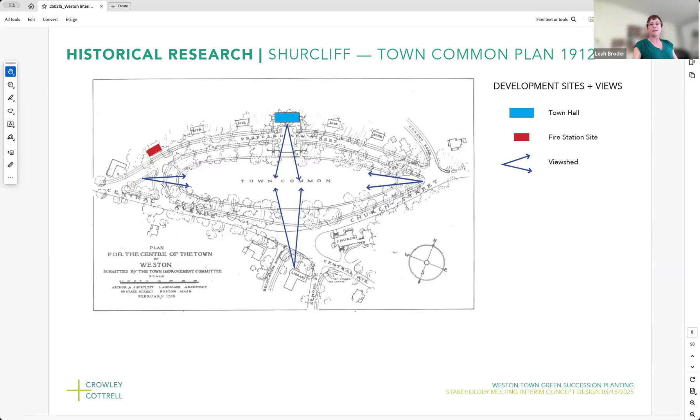Also important is that there was a prominent gathering space designed to cross the road and extend with a promontory and retaining wall into the common.

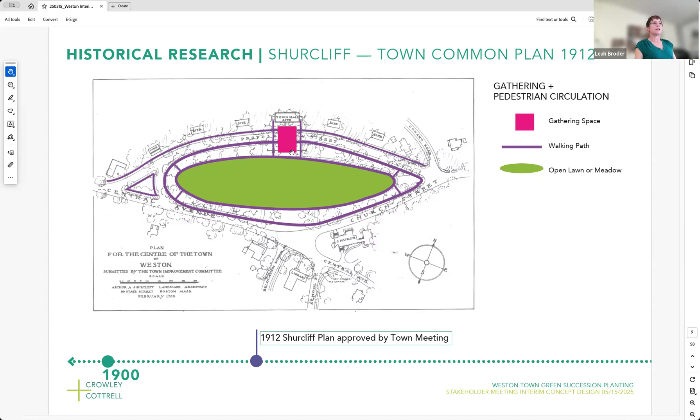But Shurcliff actually responded to site conditions that he found. So he did that preliminary plan, which is conceptual, and then in 1917 he gets down on the ground and starts designing the actual road, and in so doing realizes that the undulating topography of the existing wetland is something he's going to work with and not against.

He also recognizes the importance of holding up the perimeter road, keeping it at a higher elevation, and using the existing wall at the base of the existing shed. That becomes an important element of the plan which is there today, and we refer to as the overlook.

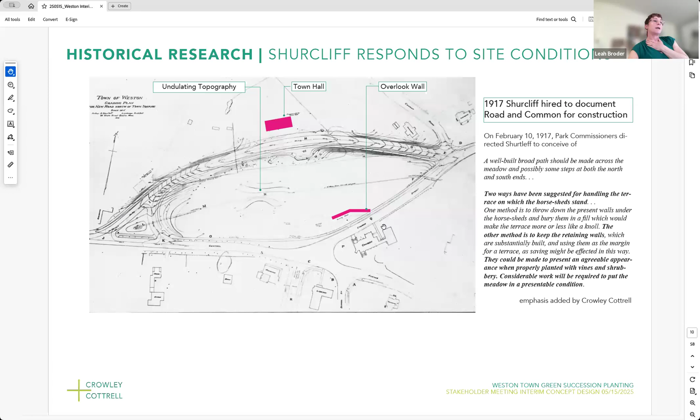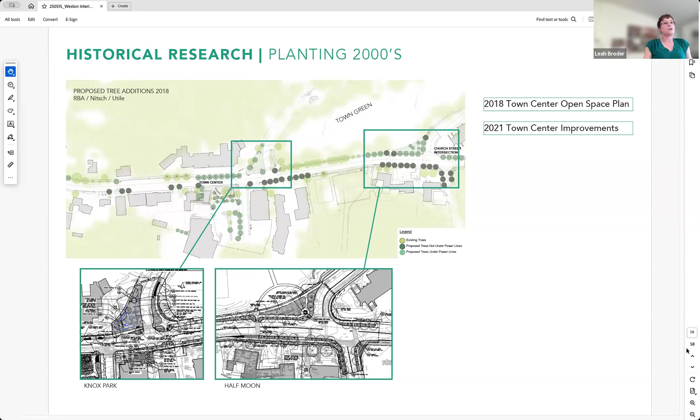We understand that there were big concerns raised about views of the church, and that those street trees would infringe upon those views. These street trees also were not planted. There was also concern about views from the town center all the way to the town hall, I believe.

So we also did a site inventory, looking at existing conditions. This is an aerial view of the site. Do you want me to do this, Leah? Sure, yeah.

The reason for us to do a site inventory is just to really document the things that are working and the opportunities and the constraints that exist right now. Some things are still remaining from the original intent of Shurcliff and some are not. So it's really important for us to just make that existing conditions report in a way.

So these are views that are into the site, and we think it's really important to acknowledge the fact that there are places where you have these long views, primarily from Town Hall across the road to the library and vice versa. We also acknowledge that there are partial views, but that really only exists on part of the perimeter. That's something we get into and acknowledge that probably wasn't the original intent.

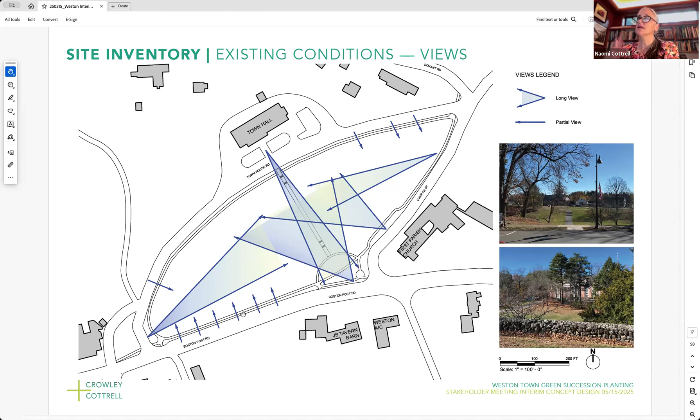So we'll make an analysis of that further. Go ahead.

So the circulation is something that does actually vary pretty wildly from the original concept drawing of Shurcliff, but there's never been, that we could find in any historical reference, an interior or a lower path.

So really any pedestrian movement that is on pavement is really relegated to the sidewalk on the perimeter roads. We do understand that this pedestrian access through the middle from Town Hall over to Boston Post Road has been in the works from the very beginning.

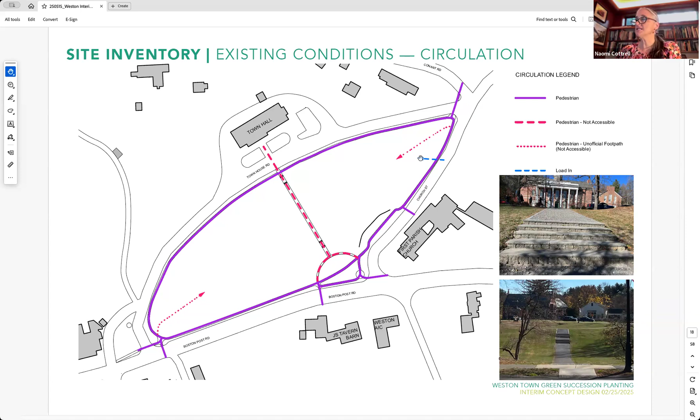It is not accessible for universal use, and so we call that out here. And then also just showing that we understand that the use of the site includes pedestrian access from the two thin corners from east and west, and certainly that there's vehicular circulation coming in from the east. Go ahead.

We have seen the photographs and understand diagrammatically how the town common or town green is used in a more formal way and in a more informal way. The formal ways being things like graduation, which is really important to the history of the town. Informal uses such as sledding down the hill in the area we refer to as the Half Moon.

There is really this feature of mixed vegetation that has grown out of years of what initially was the remnant woodland, and has been added to over time to become a collection of multi-story plants.

I believe Naomi might have been cut off, so I'll pick up while she reconnects.

We also look at topography and understand that the basic drainage pattern remains, that there is a low wet area down the center of the project, and that the high areas are at the perimeter.

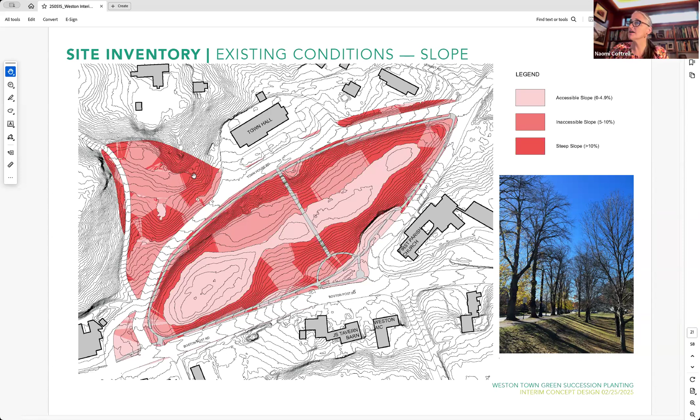We know that there's ledge, and this is part of what we will deal with, and part of the reason why our recommendations are more broad brush, because we're not picking exact spots.

We know that if a tree were to be determined to be planted in these areas, you might have to move it 10 feet to one side or the other because of ledge.

And then lastly, in our look at the existing conditions, we do understand that there is infrastructure, both drainage as well as other utilities that run through and along the perimeter of the site. Again, this is in with our thinking, but would be more something referred to when actual planting were to happen.

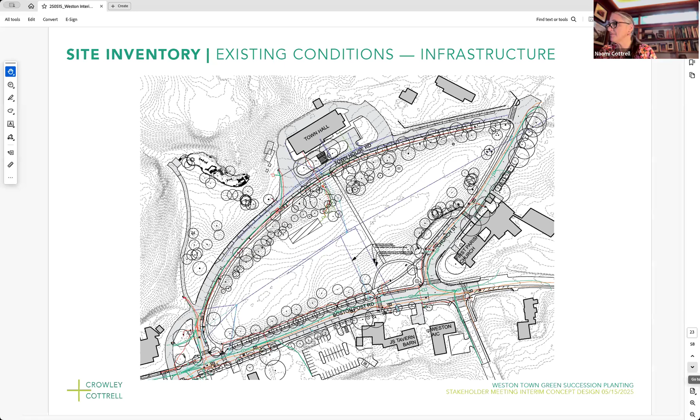Go ahead. So then we will quickly move into the tree inventory and analysis. These are drawings that we have done based on Bartlett's work on site.

They made a thorough inventory of all the existing trees, and it's very clear that the trees are grouped primarily along the perimeter of the site. We also looked at Knox and Lamson, and you can see the clusters, the way the trees are clustered.

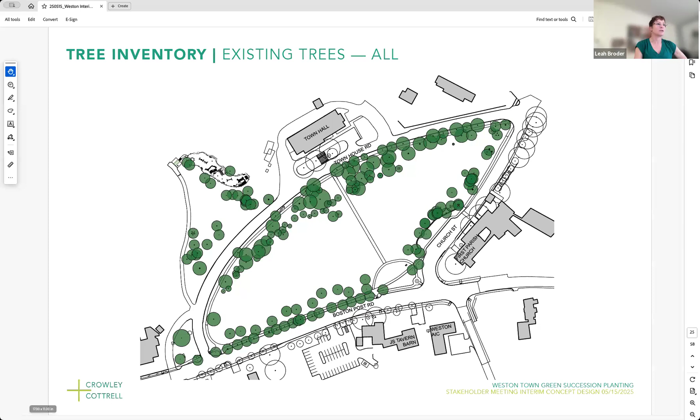We know that there is a broad variety of species, which is always good in terms of both habitat and also resilience to pest or disease. So that's interesting to look at.

We wanted to break that down a little more to understand if there was a clear strategy to the distribution of species on site. What we see clearly is that the trees planted immediately adjacent to the road, in what we call the verge, between the sidewalk and the road, are single species trees.

So we know it's the lindens on the south and the horse chestnuts on the north, but it's also clear that the consistency of those plantings has eroded over time, as Carol referred to at the beginning of the presentation.

There is a kind of range of deciduous canopy trees planted on those slopes. There is a preponderance of maple and oak, but there also are a number of other deciduous species interspersed.

And the evergreens - there are prominent ones right in front of Town Hall and also a big group of hemlocks in Lamson Park. And then there are other evergreen species distributed throughout.

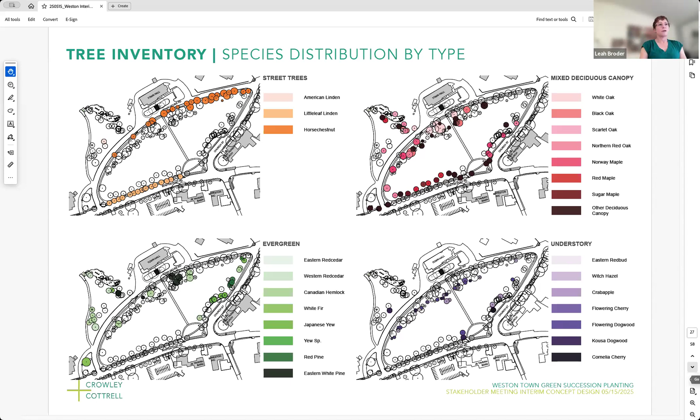And then the analytical piece of this is what Bartlett tree experts refer to as suitability for preservation. So they make an evaluation and analysis of what they find with the trees on site, and the suitability they put into 3 categories: high suitability for preservation, moderate, and low. These are based on a combination of tree health, structural integrity, species response to change, construction, and the stressors of existing conditions and uses, and then tree age and species longevity.

So in green, you're looking at the high suitability for preservation. Those are the trees we think will be around for a long time. The yellow are the moderate trees, so they'll be around for a shorter period of time. And the low suitability are trees that Bartlett is suggesting to remove, or they're already dead.

So when we move into our design phase, we're designing with this in mind, and we eliminate all those trees that we know are either dead or dying or should be removed because of challenges with the categories we just showed. We're using the basis of design as our evaluation of how to build on and edit the trees you see here, these high suitability and moderate suitability trees.

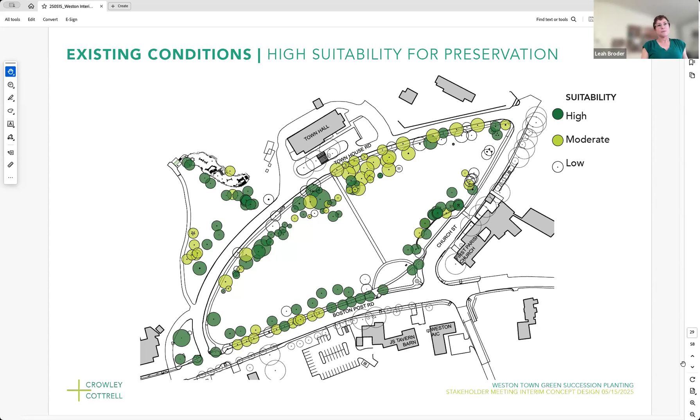So moving into our interim concept design, Naomi is going to talk about our analysis of character zones and what we mean when we refer to that. Great, thank you.

We use this term in our office, and it's really a way to talk about things that are both physical and that you can see, but also the intangible way in which landscapes hold together or don't hold together. A lot of times we will look at a space and a character is based on the type of planting or the slope, or both added together.

And really what we try to do here is look at character, the best and highest functioning character, the character that makes the most sense, and we think about which ones we want to amplify, and which ones we want to edit or decrease the value of. So as we go into proposals, there are places we actually think are really high value, and you'll see those characters expanded, and other places that we feel need to be edited.

So we have a series of colors, and that's how we show the zones of character, with yellow being where you have a street tree character, on part of Townhouse Road because one half of it has already become over mature or have been damaged and died. And then you have a very clean and successful line down on Boston Post Road. They are single species, different on each road, but that is a consistent line, and that's the character.

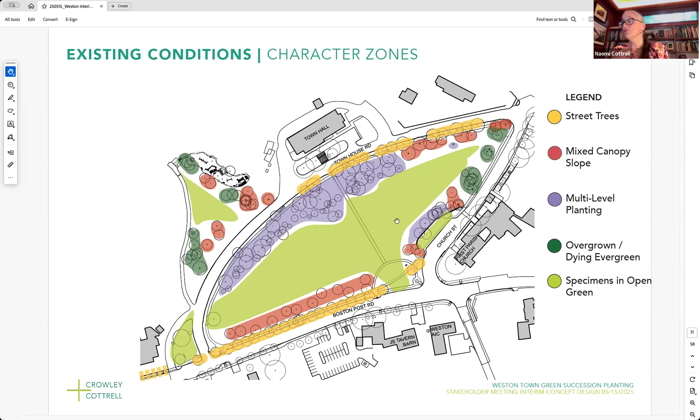So if we go to the next slide, you'll see our proposal. We are showing the street trees being consistent along the whole edge of Townhouse Road, but potentially jumping across and engaging the other side of the street. In Shurcliff's work, it was clear that he anticipated Townhouse Road to have a character of trees, and that it wasn't one-sided. We are suggesting this double-sided alley, a really strong, bold move that's quite civic in character. We are also proposing extending the idea of a tree-lined street through Knox Park to hold that edge and create a more interior feel on that parcel.

I want to talk a little bit about the multi-level planting. Skipping to the purple, we actually think that this area with the multi-level planting should be shrunk and be a little bit more symmetrical just right around Town Hall. We see the value of being able to see into the town green as really important. So on the area to the west of where the multi-level planting is, a little bit further west, right in here, this area, where we're showing it then being red, to start to eliminate the understory, start to take away and edit out so that we have more cleared views.

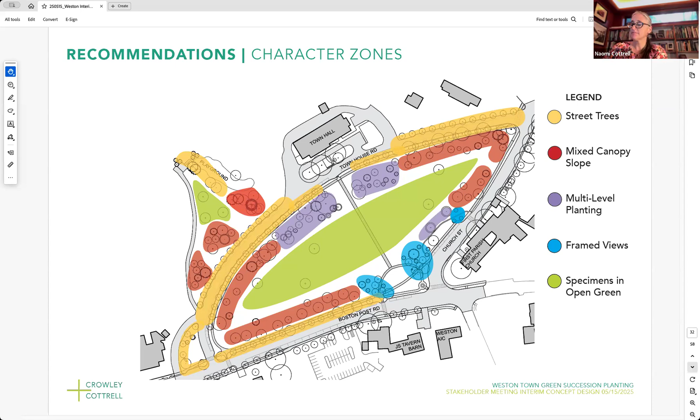So Leah, you're muted. We are choosing to show you these diagrams with all of the trees color coded to follow these character types, to reinforce the idea that this is really zoning, and we're setting up a structure for the space.

So just to reiterate, we're talking about, and we'll go through each of them, what we mean by street trees, what we mean by the mixed canopy slope, what we mean by the multi-level planting, which is just beneath Town Hall and beneath the overlook, how we frame the views with trees, and what our intention is with planting specimens in the more open green areas.

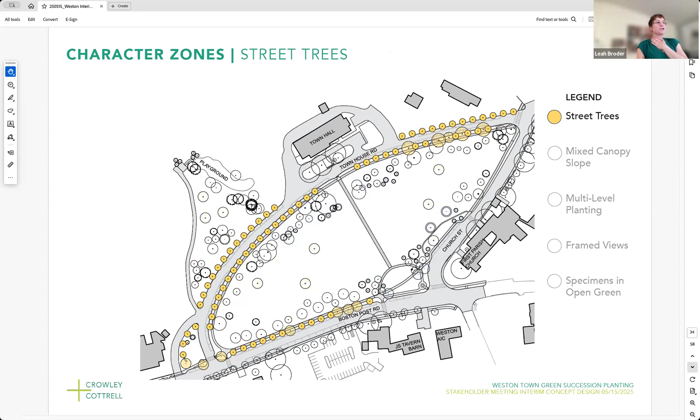So looking first at street trees, the existing character on Boston Post Road with the lindens, which is a very clear street tree planting. As Naomi mentioned, we are interested in amplifying this, and we know that Shurcliff valued this and was looking at similar planting elsewhere and thinking about implementing it here in Weston.

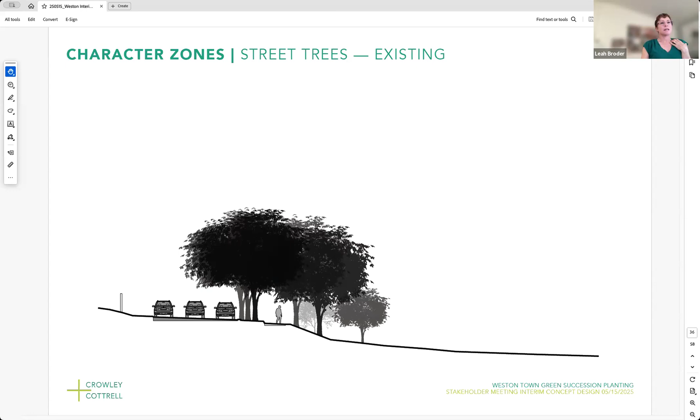This is a sectional cut through the road, Town House Road. Looking at the street trees, which are planted right now, not totally regularly spaced, so they kind of stagger, and there's a dense planting beneath them on the slope. Our proposal is to, over time, plant a more regularized single species of street trees using both sides of the street. We feel this is a really strong move and gives the town the opportunity for flexibility when there are street trees planted on both sides with regular spacing.

When you encounter infrastructure, utilities, or ledge and can't plant in certain places, because there will be many other trees planted on one or the other side, the larger move and the sensibility of driving through a canopy of trees or walking through a canopy of trees will still be there.

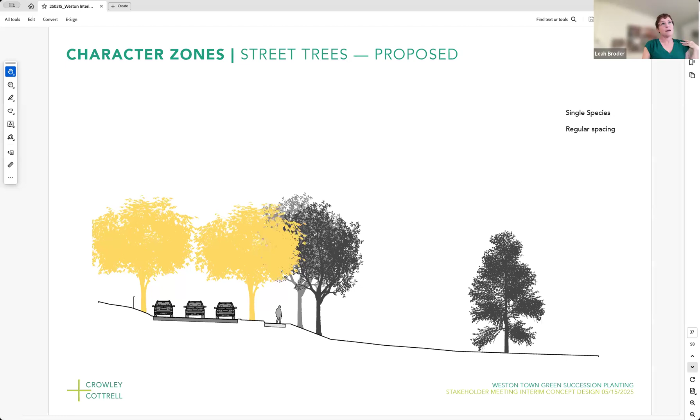In contrast, the mixed canopy slopes we are intending to be distinct from the street trees, amplifying the irregular spacing of these trees and being mindful about actually mixing the species and using both deciduous and some evergreen trees. We have heard in feedback so far that there is interest in having some evergreen along particularly the northern edge, so that in winter the edge of the open green is really legible. So we're interested in that.

And then we showed these kind of clusters of a mixed species palette. This is the existing cluster at Lamson Park that we think is working beautifully, and we're looking to pretty much recreate that sensibility on the slopes. Whereas today in this area there's all evergreens, we're interested in integrating a mix of deciduous and evergreen, bringing that all the way up to the playground.

This is the character of the kind of mixed deciduous slope. In fact, I think many of these are lindens along Boston Post Road, but this irregular spacing that is so distinct from the regularity that's on the road is what we're interested in. And the fact that the trees really hold to the slope so that the flatter portion of the site is something very different.

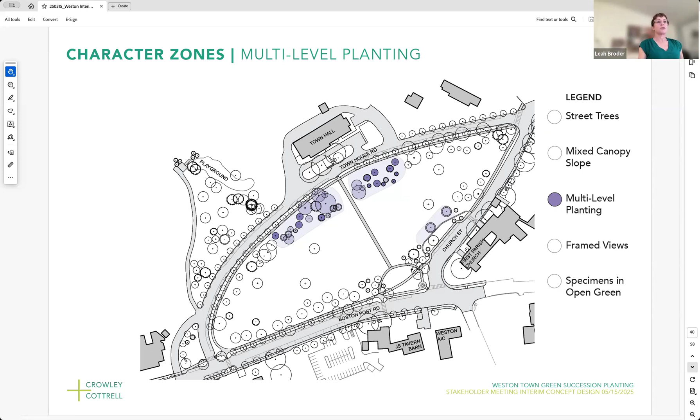The multi-level planting that Naomi referred to before, we want to amplify that. We think it's a beautiful piece of the town common, and particularly knowing that it's used really 12 months of the year, it's very nice to have seasonality in the canopy, both among the trees, but even some shrub and understory planting. These are views today in different seasons, a spring view looking at the town hall and a winter view. You can see some people in the foreground who are there sledding.

But we talked to you about the value we think there is in opening up these views. And we know from the documentation we have from Shurcliff that in fact, the whole colonnade was intended to be clear of trees.

Ooh. Oh, sadly, we had a view of that that I think I've somehow missed. But if you can imagine that that's our intent.

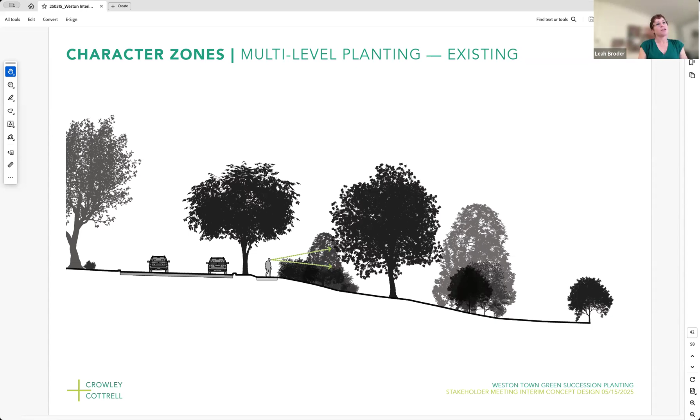So looking at this sectionally, this is the same area of the multi-level trees, and what we know is that they now kind of bleed into the flat portion of the site. This is the existing condition. In our proposal, we're looking at editing out some of that, making the zone more distinct, that it really occurs on the slope, and that the street trees right in front of town common or town hall would not be replanted, the ones that are immediately in front of the colonnade.

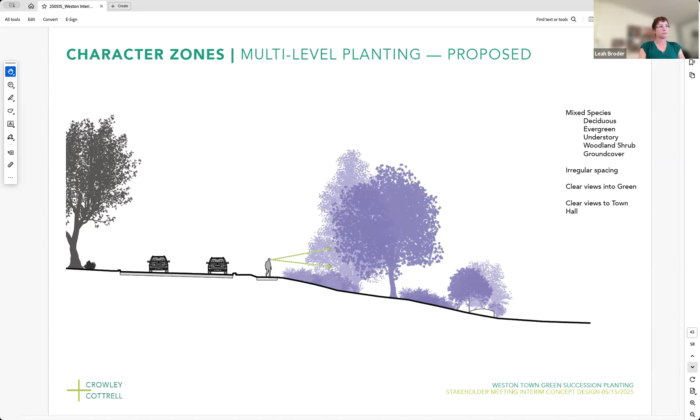Here we go. So this is the proposed view with cleared views. If you recall, the existing condition really does have planting in this area, and we're interested in holding it further away from the path, further away from the colonnade.

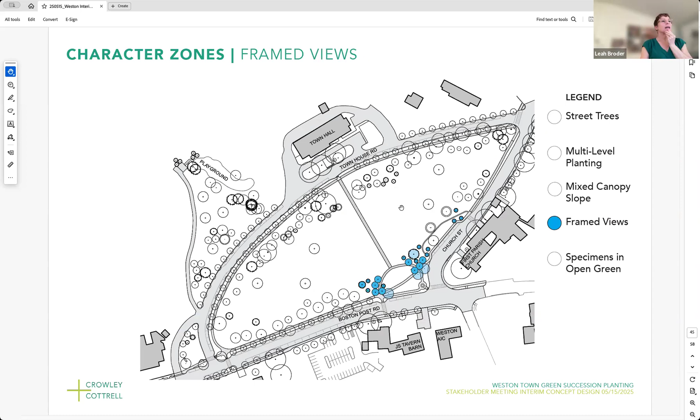The framed views that we talked about, so we were referring to this area as the half moon, and adding trees at the perimeter to make those bookends, and then adding some understory trees at the perimeter and clearing the center at the overlook. So this is the half moon area today. You can see the town hall here and the church to the right.

So in turquoise, an idea about creating thicker groves at the two edges, but maintaining the center clear.

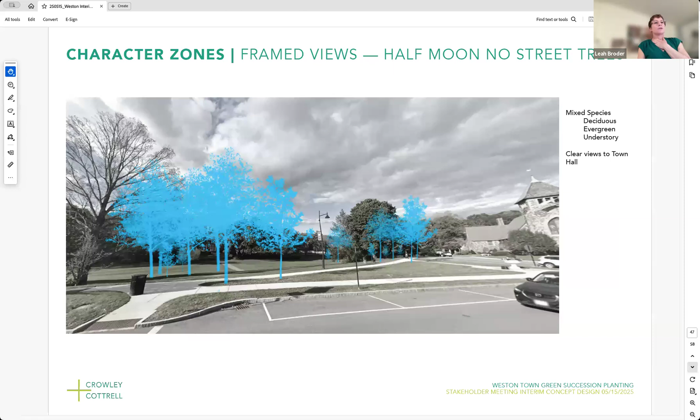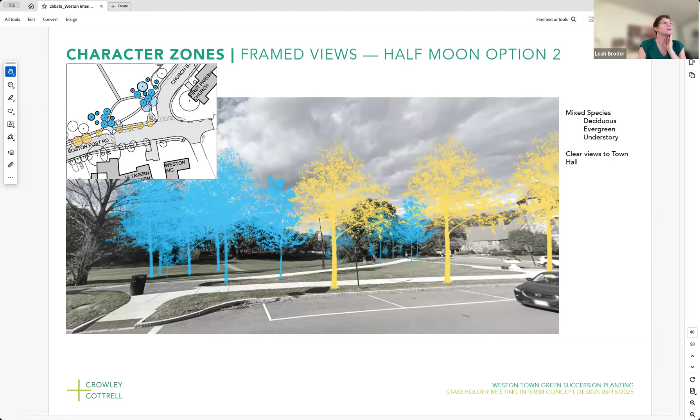We have a second idea, which is our reaction to the openness of this space and our experience with urban heat island effect, knowing that because of all the asphalt and paving in this area, this sidewalk that is fully exposed and wraps around this half moon area is very hot in the summer. We were interested in proposing street trees in that zone so that shade could be cast on the sidewalk. We think this area is really ripe for occupation, potentially furnishing. It has nice views into the green, and it's a really civic space, but right now it feels quite underutilized because of its uninflected openness.

Looking at this, can you just go back for a minute? I want folks to understand where this view is from. You're not seeing that clear view to the town hall because this is an oblique view. So what you're seeing is the sides of these trees, but if we were to move to the library, there would be this opening. In this version, there would be yellow trees that you'd be seeing underneath. But the idea being that the cluster of trees, the grove or the bookends as we've been calling it, are not obstructing that clear, say, 70 feet that would be open in front of the library directly across from the town hall.

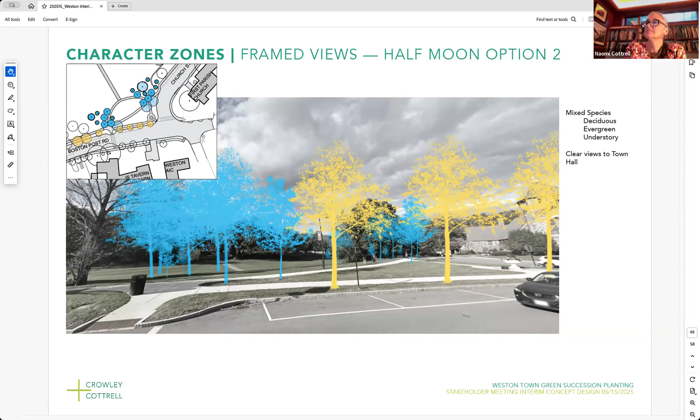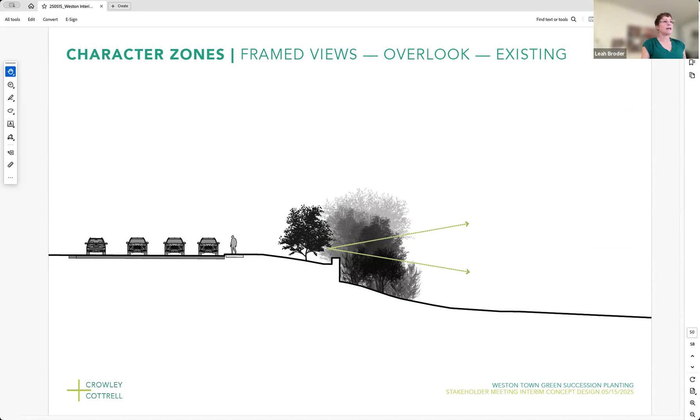The overlook - we find the actual physical structure of the wall to be quite interesting and important in the history of the site. Today it is completely obscured because of the evergreen vegetation and overgrown shrubs at the low side of this wall. You can see from standing on the wall that the shrubs begin to obscure the view. So we're interested in opening up those views, both from inside the green looking at the wall, and from on top of the wall looking out toward the town hall. Today, if you stand on that sidewalk, your views are obscured. There's a small tree in the grassy area at the high side of the wall, and lots of mixed planting beneath the wall.

We know historically there was a large elm tree here, and we think that's a really beautiful thing to bring back - the idea of a single specimen tree that can grow very large over time and really make almost a kind of room at the top of this wall, to draw people down so they can occupy it and look out to the town hall, clearing that understory and brush, clearing some of the evergreens so those views remain clear.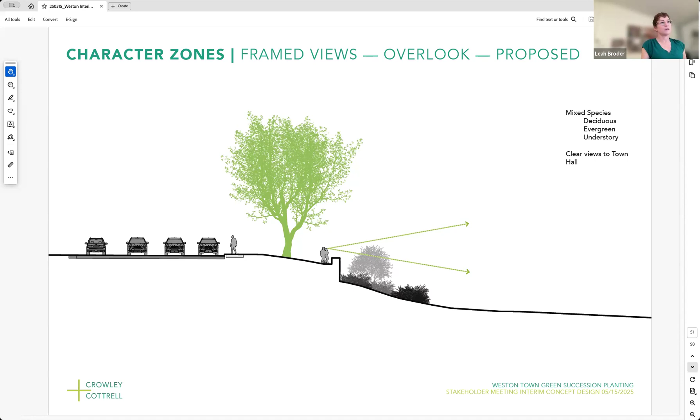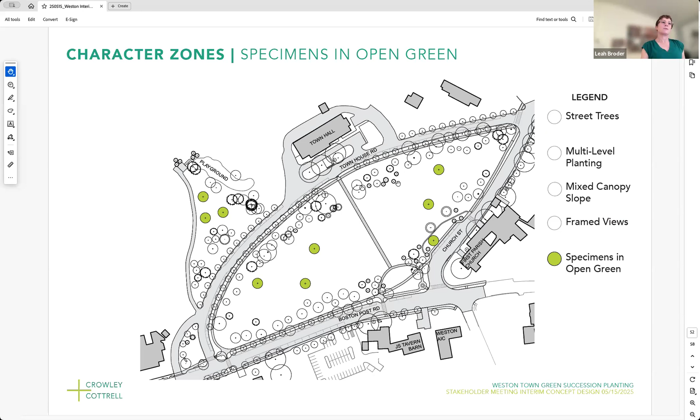Talking about specimens in the open green - we think it's a nice move to draw people into the green, to have some specimen trees intended to be viewed in the round, that can get very large or have particularly sculptural form and seasonal interest. We think the same idea can be used in Lamson Park to encourage occupation of the open lawn area, which we believe is underutilized, while of course being mindful to keep clear areas for events. We know how important that is for the town.

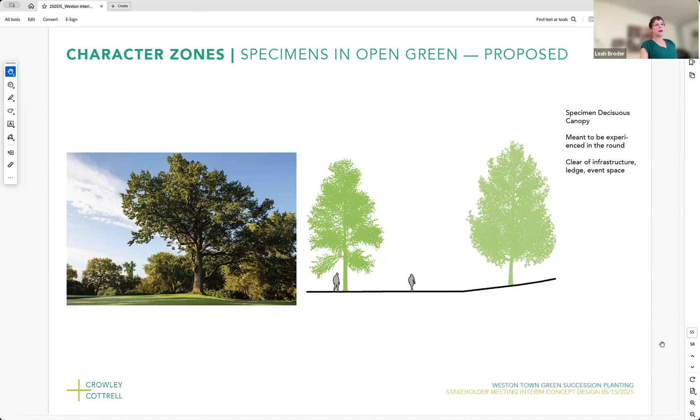So back to our summary diagram showing the variety of character zones that we're interested in proposing, and we're eager to hear people's reactions, thoughts, and questions.

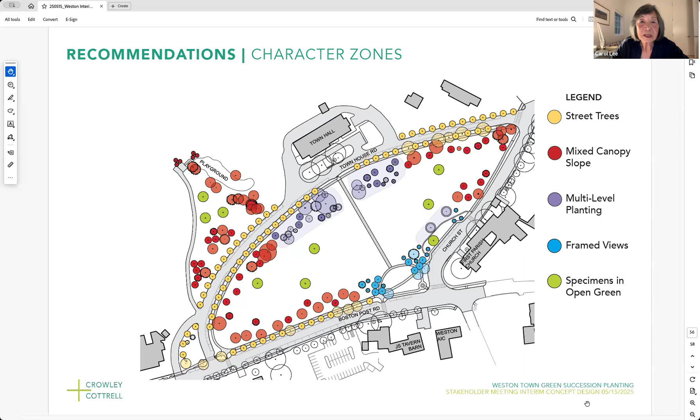So mixed canopy doesn't mean deciduous, it just means mixed. It means it would also include evergreens.

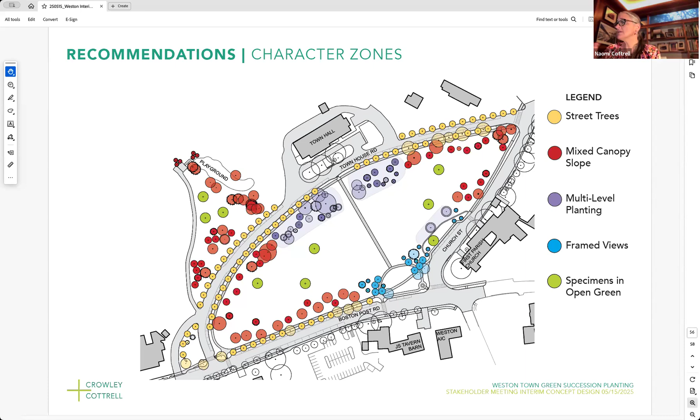One thing we didn't walk you all through is the way the trees are drawn here. As a drawing convention, we draw an evergreen with a jagged edged outline, and deciduous trees with a smooth outline. So we're not only saying it's mixed species in this edge zone, in the slope zone, but that it's also mixed deciduous and evergreen.

We think that Lamson actually has some really nice moments, as Leah was saying. There is this drift of predominantly oaks, but also some evergreens within it that is really lovely. They're some of the nicest trees, in my opinion, in and around this area as a cluster and a group. So that's really where we want to amplify that character.

So when the hemlocks need to come down, when that slope needs to be replanted, we'd like to establish some new drifts that are similar to that.

But then in the area that is the flattest part, up and around Lamson Park, we are having some standalone specimen trees out in that lawn to really encourage people to spill out from the playground area and use that flat lawn with a little bit of points of shade on it, as a way to make it more comfortable to spend real time there. So we're treating that flat area the same as the flat area within the town green itself, with specimen trees dotted through it.

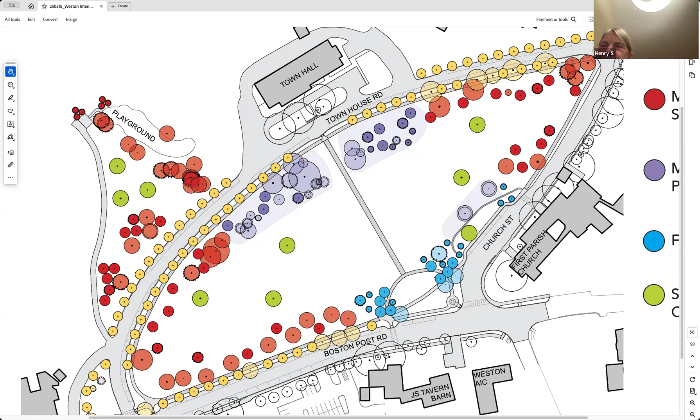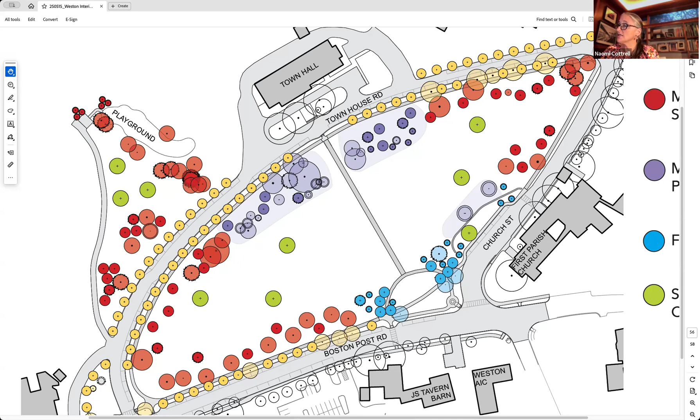Well, I think just to talk about some of the points you bring up, this is something we're seeing as a living document. It's not like tomorrow we go in and decrease the purple character. But as horticultural maintenance, that area is the hardest to maintain, and we want to make sure a planting like that stays healthy, viable and well maintained. So we do think reducing it some, on the western side, is going to help with that, and make the maintenance and cost to keep this place great go down.

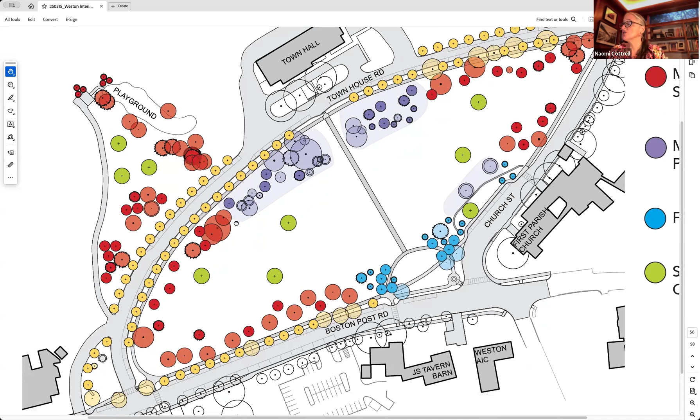The other reason we thought it was important to take away some of the understory here, and to the west a little bit, is that we actually think Knox Park, Lamson Park and its connection to the green can be more amplified. By taking away some of the blocking views, it starts to make those two areas feel more connected, so you can see from one into the other more. This is a subtle thing, but the big idea is to have a little more porosity, and to really make the multi-level, mixed species purple area be spectacular because it's not stretched too far, if that makes sense.

Yep. Barbara? Yes, I think it's a great plan. Thank you for working so hard on it.

So there are some things I don't understand completely. Over on the left side, to the left of Lamson Park, where the hemlocks are, there's some now that have the woolly adelgid and will eventually have to be taken down. So I wasn't clear what you were proposing to put there in their place, whether you were going to propose more hemlocks right there, or start to integrate some other types of trees in that area.

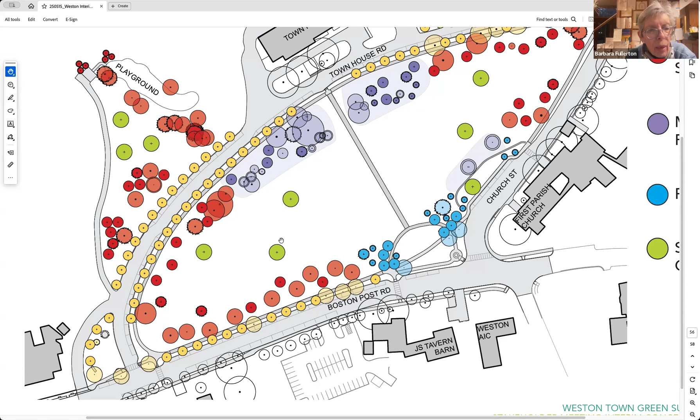Leah, can you navigate to... Barbara, this is a great question. Can you... oh, navigate to... hold on a minute. Oh, sorry, I had my headphones on, so I couldn't hear you.

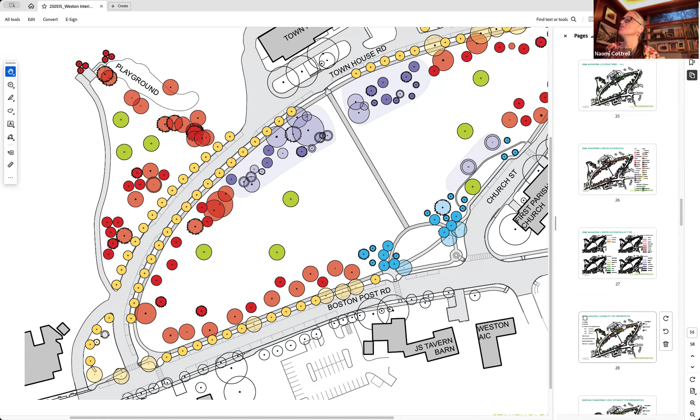I was just saying I wanted Leah to navigate to the tree health and suitability for preservation map. The trees shown in yellow are predominantly the hemlock. Bartlett hasn't called them yet, they're not red trees. We know there's no cure for the woolly adelgid, only treatment that has to continue through the life of the tree. What we can imagine is that you may reduce the number if some are sicker than others, and then make a commitment to treating a few that remain.

For any of this plan, there are really clear recommendations: don't treat or do anything to the red trees, they're pretty much goners, and don't spend town resources keeping them. Now, yellow is a different story. I think when you find the best ones of a group, there might be one or two that are really great hemlocks you'd want to preserve. So our scheme can actually work with that.

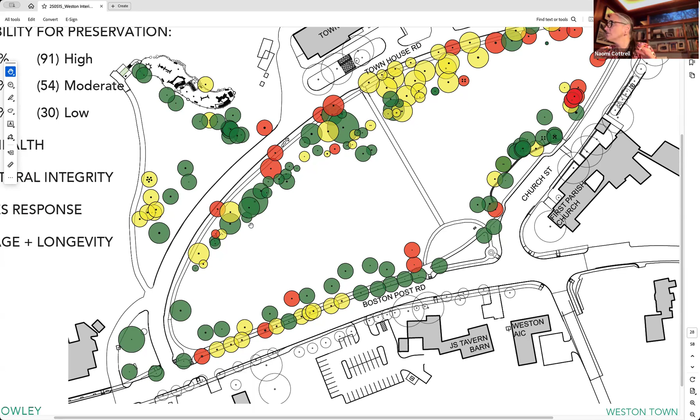If there are say one or two that the town deems important to treat and save, that works into the multi-species grove or drifts we're showing in our plan. We think the clusters of oaks and evergreens mixed together up here is really the way to go. What we would not do, Barbara, is have a big grouping of just hemlocks. We'd imagine picking out a few of them and really mixing it with some beautiful hardwoods.

Okay, so I had some other questions also. Going back to the other image you had showing the street trees, if you could go back to that, the previous image.

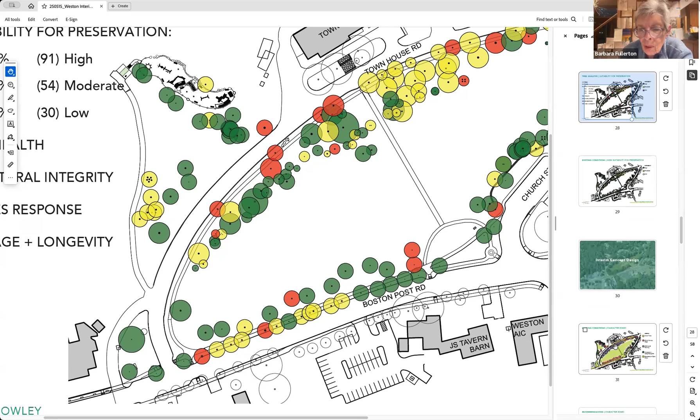It just seemed to me that there are an awful lot of the yellow street trees that you proposed to put in along the roadway, the Town House Road going up past the town hall. It seems like it will feel awfully crowded. I know maybe some people like to have it as an alley, sort of closed off, but to me it seemed like a little bit too much in terms of tree number. I don't know what other people may think about that.

The other thing is that down where the blue trees are making the framed view, there was the red maple that died and had to be removed. I think maybe that was on the left side of the blue group, to the left of the half moon area. Maybe that red maple was there. And then there are the two little trees just to the right of that.

It seemed to me that maybe there are too many trees in the blue group. I'd like to see the red maple replaced, and maybe a couple more that are to the right of where that red maple was. But I sort of prefer having that half moon area be a little bit more closed, or more open than is shown on your drawing, and maybe on the other side too. I don't have a memory of what's there on the right side of the half moon.